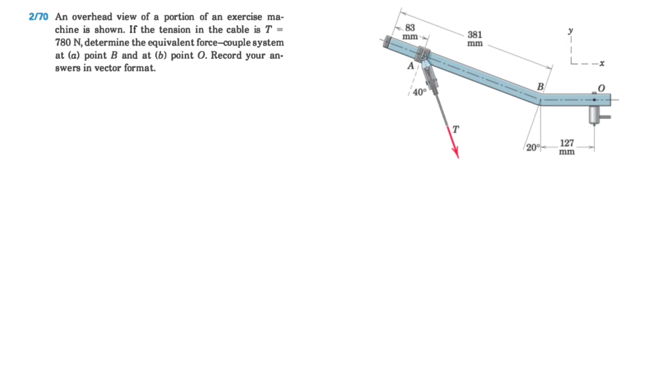So we are dealing with a force couple system. We need two things: force and a moment or a couple. So for finding the force, we have our x and y in here.

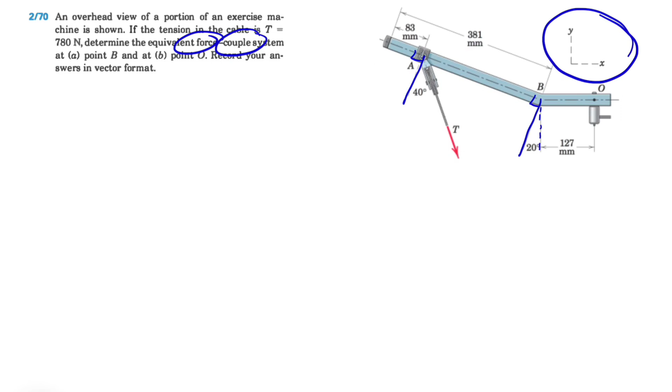So if you look at these two lines, these two are actually parallel to each other. Each of them are perpendicular to here. And if we draw this vertical line in here, this angle here would be 20 degrees, meaning this angle here is 20 degrees too. Since we have 40 for the whole angle, each of them will be 20 degrees.

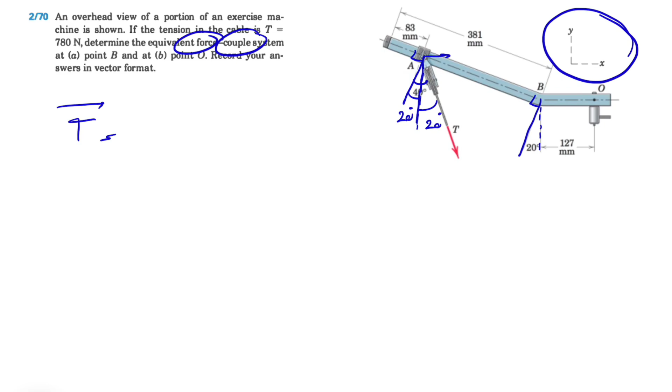Now that we have the 20 degrees with the vertical point, it's piece of cake to find the x and y component. As we can see, the x component will be to the right, so this will be our x component and this will be our y. The x component is positive since it's to the right, so T times sine of 20 degrees, that would be our x component, or i. Since the vertical component is downward, we have a negative sign, and it will be T cosine of 20 degrees, and j. Keep in mind that we have to have everything in vector format.

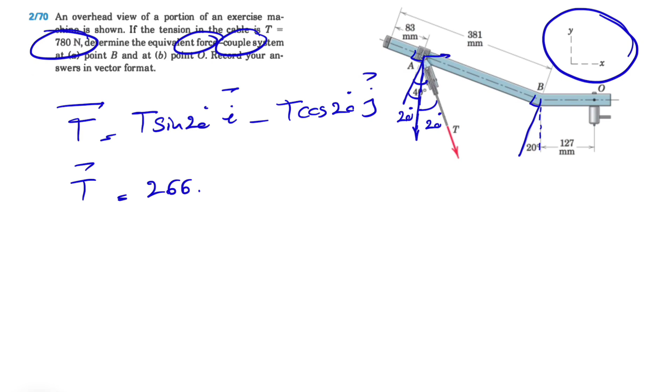If we calculate this, we already know that T is 780. From the first one we get 266.8, and we get minus 733 j, and the unit will be Newton. That's our force, so the force is done. For part A and part B, we have the same force, and that's pretty much the force that we have, since that's the only force that we have in this figure.

Now we have to figure out the moment, and what we're going to do for the moment is we're going to take a different approach. Since this angle is 90 degrees and we know this part is 40 degrees, this angle right here is 50 in order to make that right angle. So 50 plus 40 gives us the 90 degrees.

But if we look at this, if we want to resolve it, I'm going to show it in red, then we can see it better. Resolve it into this component and this component of our T. The reason I'm doing this is that we can cancel out the moment of this component because it passes through point B, so no moment from that one. We basically have the moment of the perpendicular component to AB, and that's probably the fastest way to find the moment here.

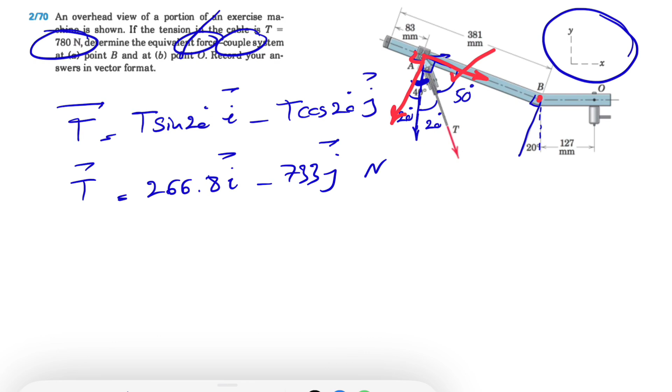Obviously we can go with the T that we found in the previous step, x and y component, but we have to figure out the perpendicular distance of the line of action to point B in order to find the answer. But this is the easiest way, and if we want to find the perpendicular component, we can see that that would be T.

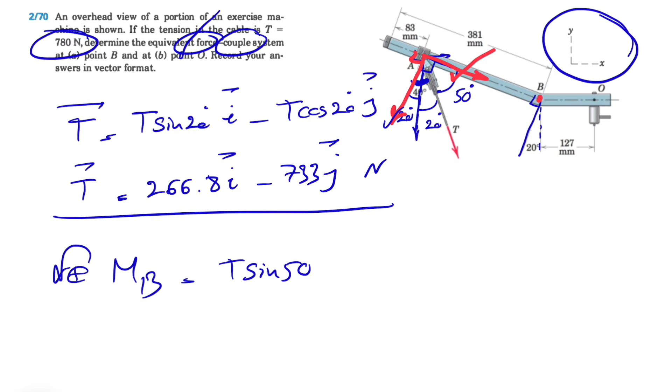So we're trying to find a moment about point B, counterclockwise positive as always. We have T sine of 50 degrees, and the distance would be what we have from A to B, which is 381 minus 83 over 1000 in order to get it in meters. What I did basically is subtract this distance by this one in order to get what we have from here to here, and this will be 298. If we calculate the moment, we're going to get 178.1 Newton meter, and the direction, as we can see, is counterclockwise.

So that's part A of the question.

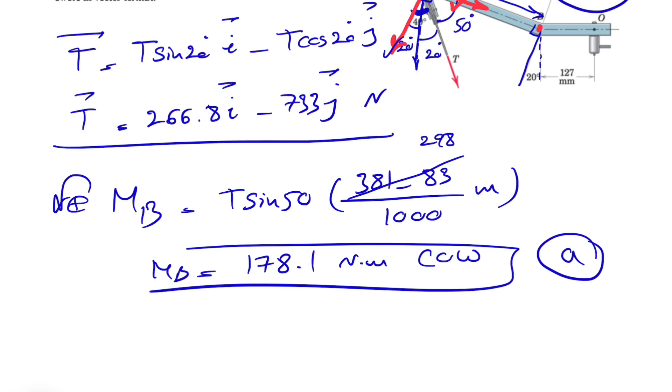Again, for each of these parts we need to report both T and moments, and that's going to be our force couple system. Since we are in 2D and asked to express the answers in vector format, our moment will be in the z direction, and since it's counterclockwise, positive, so we put a k in here. That gives us the moment in vector format, and our T we found in the previous step: 266.8 i minus 733 j. That's the answer for the A part of the question.

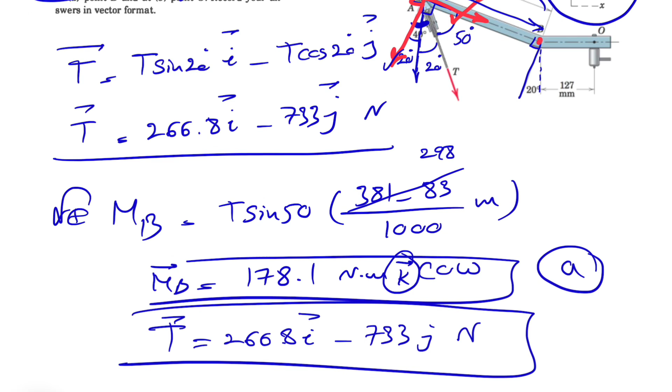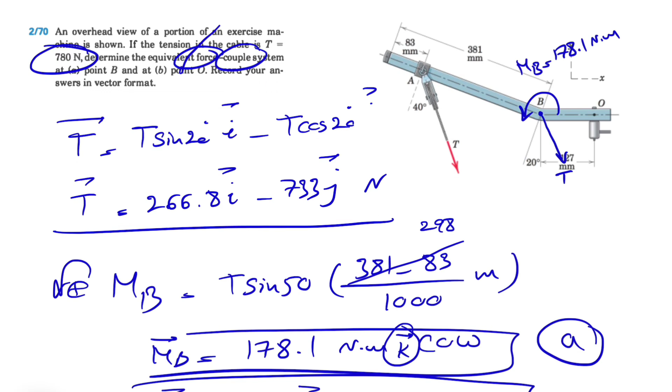In the B part of the question, we have to find the moment about point O. Let me clean up the figure. If we want to show the force couple system at point B, basically what we have at B is this force T, and we found our moment MB, which was 178.1 Newton meter, and this is our force couple system. If we're asked to show it, this is how we show the force couple system.

So this is T, our force, and we have the moment. The second part is pretty easy; we have to do the same thing. I'm going to show the second part with a different color, maybe light blue. We have the same force T here too, and we have to find the moment about point O, which we're going to show in this way. To do that, we have to find the moment about point O.

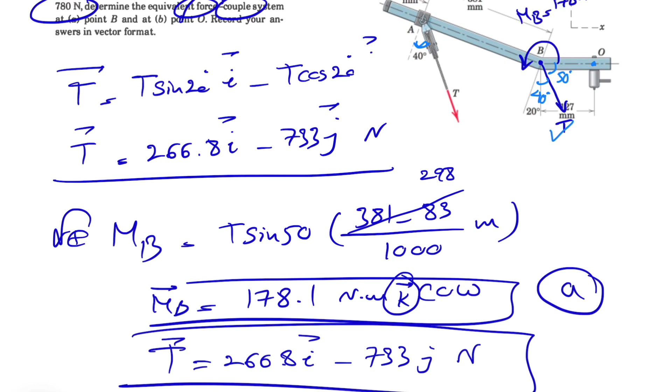We have two things. First, as we talked about, this angle here is 40 degrees, which is what we had before, and this angle here would be 50 degrees. For finding the moment about point O, let me clean this up, I'll show it at the end. So the moment about point O equals the moment of T plus what we have at MB. Our MB is 178.1 plus the moment of T about point O, which we can again resolve into two components.

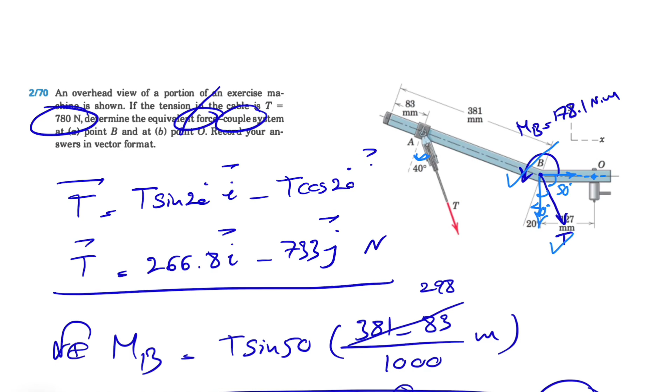As we talked about, the horizontal component won't make any moment since it passes through O, and we're left with the moment of the y component, which is T sine theta. So T sine theta times the distance from O to B, which is 127 millimeters, divided by 1000 to get it in meters, and theta here would be 50 degrees. Actually, I don't know why I put theta there, so it will be 50 degrees, and this is going to give us the moment about point O.

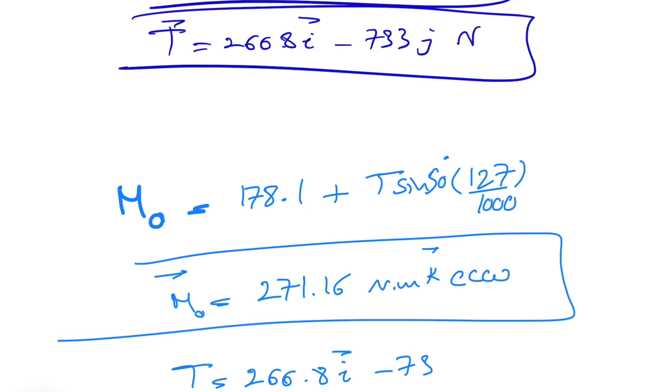If we calculate this, we'll get 271.16 Newton meter, and the moment would be counterclockwise. We want to show it in vector format: the moment will be in the K direction, and since it's counterclockwise, it will be positive. And the T we have is the same as the previous part, 266.8I minus 733J Newton, and that's going to give us the answer for the B part.

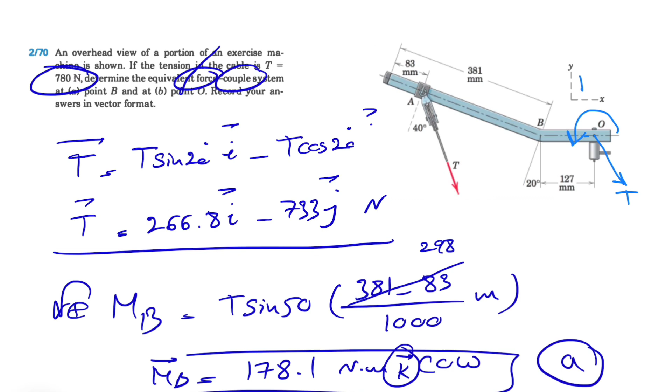Again, let me clean up. If we want to show our force couple system at point O, basically we have the same force T, and the moment this time would be our MO, which was 271.16 Newton meter. So yeah, that's pretty much everything for this one.